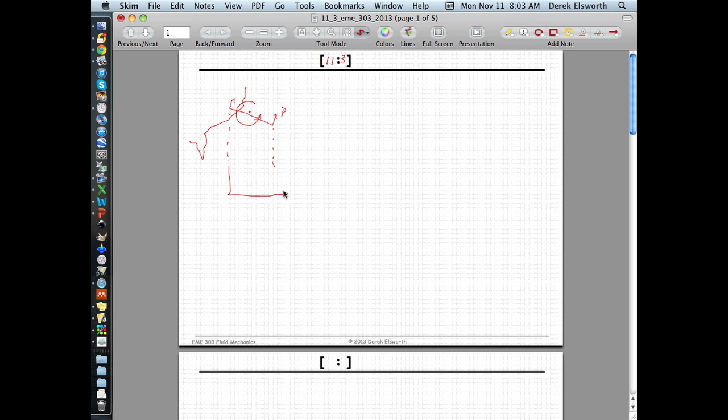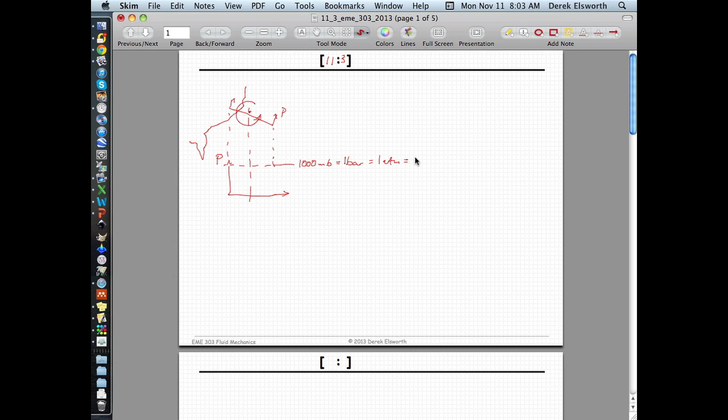If you look at how the pressure changes as you go across the eye, the pressure in the center of the storm is depressed over normal atmospheric, which might be something like 1,000 millibars, which is obviously 1 bar, which is 1 atmosphere. All these synonyms - we know that 1 atmosphere is 100 kPa, so 0.1 MPa.

The depressed pressure in the center of the storm might be something of the order of 900 millibars. So this depressed pressure is lower by 0.1 of a bar, 1/10 of a bar, and that is 0.01 of a megapascal. So 0.1 bar is going to be equal to a hundredth of a megapascal, or roughly 10 kilopascals.

So if you think about the surface of the ocean, what that physically means is that this pressure here is lower than that. If you imagine what the ocean must look like, it bows up to deal with that. What we know from fluid statics is that if you go horizontally in a static fluid - it's not quite static, but it probably is to some reasonable approximation - then the pressure at this point has to equal the pressure at this point.

So if the pressure at this point is equal to 0.1 MPa, and this pressure here at the surface is equal to 0.1 MPa minus a tenth of that, then this height here has to be, to catch up with it, such that the pressure change equals the difference in these. So going up from here, you have to subtract off a pressure to equal this amount here, and this change in pressure has to be 10 kPa.

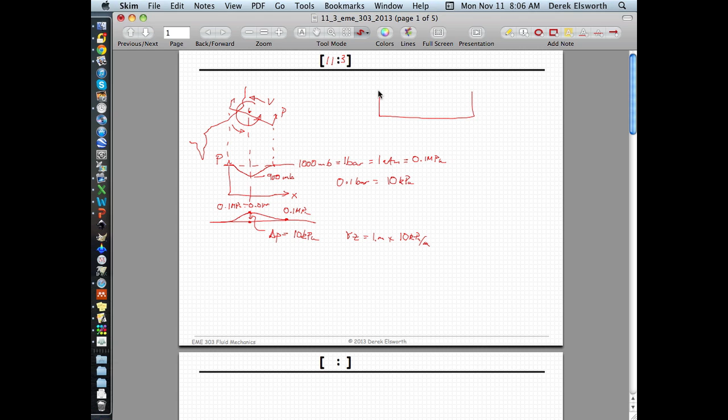So I suppose you could also do the calculation where you look basically at this length of sea that has some velocity pattern above it. This is just out of curiosity more than anything else.

If you look at the wind velocity versus elevation above the sea level, it would look something like this. Close to the sea, it's going at zero because it's attached to the water. Up here, it would be going at the atmospheric velocity, which might be 200 miles an hour, or actually higher—the jet stream moves at something like that. So there's this difference in velocity that occurs here.

We know from Newton's law of viscosity that viscosity times the change in velocity with location—this is velocity in the x direction, but with vertical location—drives a shear stress. So if you think about it, that shear stress is being applied onto the top of the ocean.

This length might be, I don't know, some length here. What you could do is a simple calculation, just a free body diagram. If you looked at the effect of that, you have this tapering wedge. It's kind of pushing the water up with some force, and there has to be a force pushing back on this side. This force would be some unit weight of water multiplied by some height.

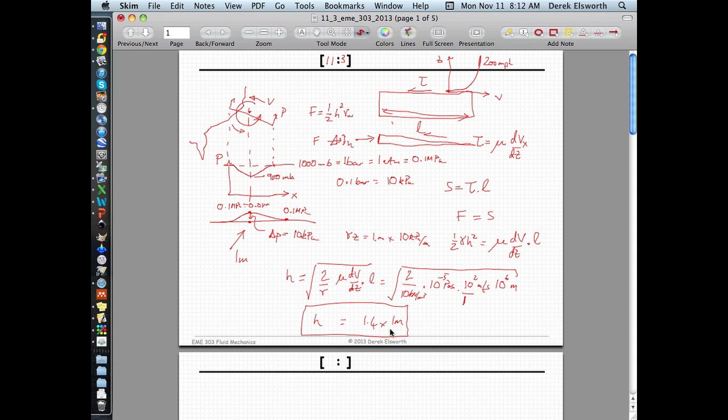So you need to use this is 1,000 kilometers, right? 10 to the 6 meters. And that's of the order of a meter or so as well. So a couple of meters. They're talking about this wall being multiple meters tall.

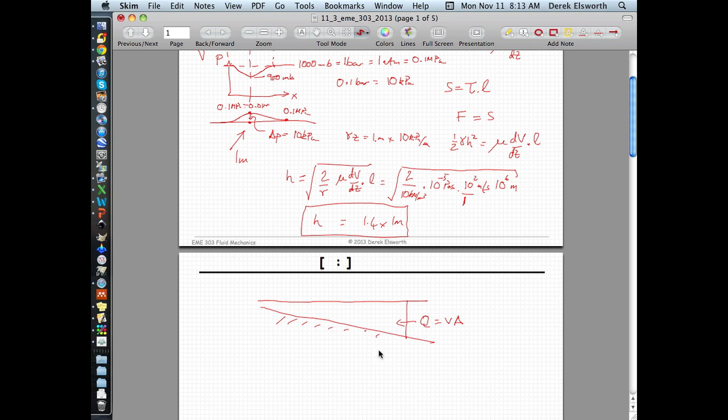I guess the other effect, which you also see with waves breaking on a beach: if you think about the shoreline looking like this, and the actual sea bottom looking like this, you can think of waves as a flow rate equal to velocity times area. If this cross-sectional area reduces as you come onshore, the flow tries to speed up. It can't speed up because it has inertia, and as a result it gains height, just like breaking waves.

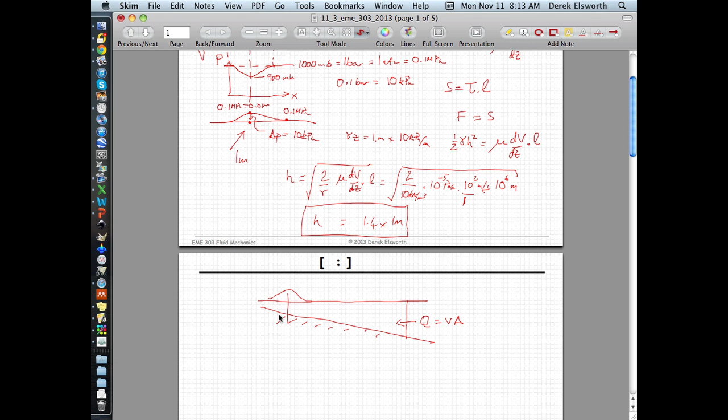We know that tsunamis, which are tidal-ish waves offshore, are really only a few centimeters tall, but when they come onshore, they're influenced by this reduction in depth, and they pile up against the shoreline, moving in like a big plug, slowly raising the ambient level and moving inshore. So you certainly have enough fluid mechanics to look at those things today, but that's not what we're talking about today. That's the reason for the unfortunate circumstance in the Philippines.

What we were going to talk about today is our continuing quest to understand flow in pipes. This builds on what we've talked about so far. Two things we'll cover are pipe networks and how to measure flow rates. We've talked a little about flow rate measurements with Venturi flumes in the absence of viscous effects, which now we're incorporating.

Let's see what we have on here to look at this. Flow in pipes—we didn't really talk about this at the time, but we mentioned it. The Deepwater Horizon problem was actually a failure in the material around it. I guess this is the picture of what is thought to have happened. This is a paper in the Proceedings of the National Academy of Sciences that looked at the behavior offshore.

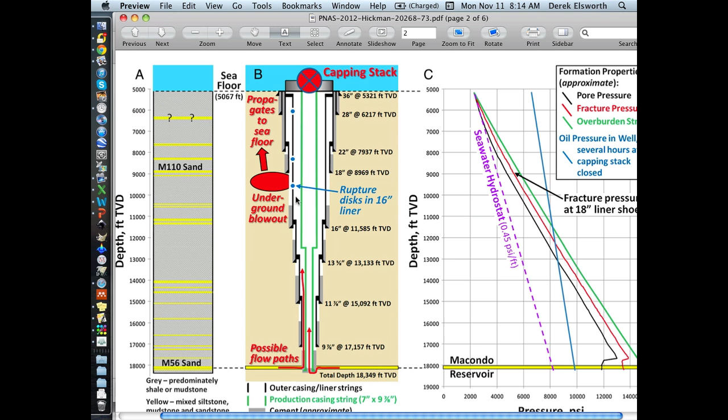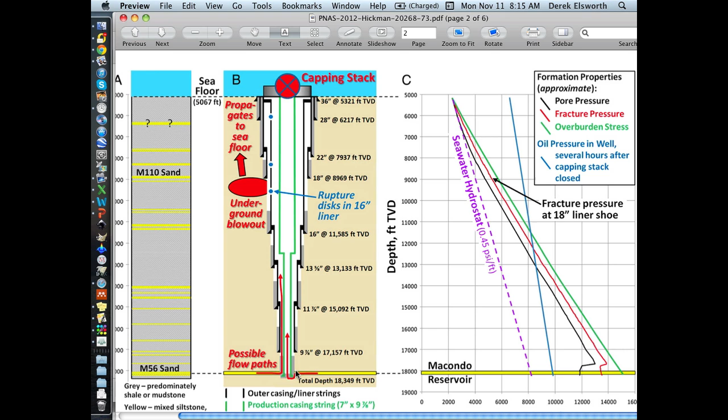The idea is as you go down, you have these multiple nested casings. You start off with a big hole, drill to some depth, then put a smaller hole beyond that, and case progressively narrower and narrower bore until you get to the reservoir. In this case, at 18,000 feet below sea level, which is 3 miles—just amazing. The sea level there is a mile deep at the location in the first place.

What is supposed to have happened is that you have overpressures here from compacting the sands. They really aren't reservoirs as you think of them, but very loose sands. As you put more material on top of them, they take the weight of that material and push that into the fluids column.

The fluids column is the hydrocarbons and waters in there, which is the same idea as if you take a sponge and put it in a Ziploc bag and loaded it—the sponge would take that load because the fluid can't get out. If you take the sponge full of water and just compress it, it'll just compress. But if you stop the fluid from going out of it, it becomes quite rigid and can take a much larger load. Reservoirs are kind of like that—soft reservoirs with very low permeability. The fluid can't escape, so it's like being in a Ziploc bag.

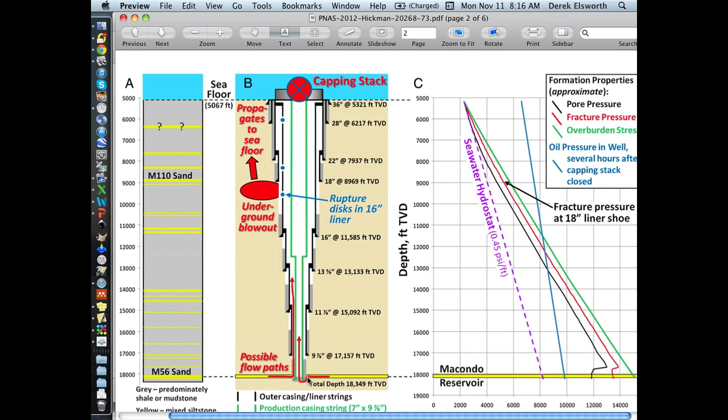So you can get overpressures. If you look at the pressure column as you go down, you can end up with fluid pressures which are actually much bigger than the lithostat, in other words, the weight of rock sitting above you. And when it gets larger than the lithostat, it fractures the rock naturally and tries to get up.

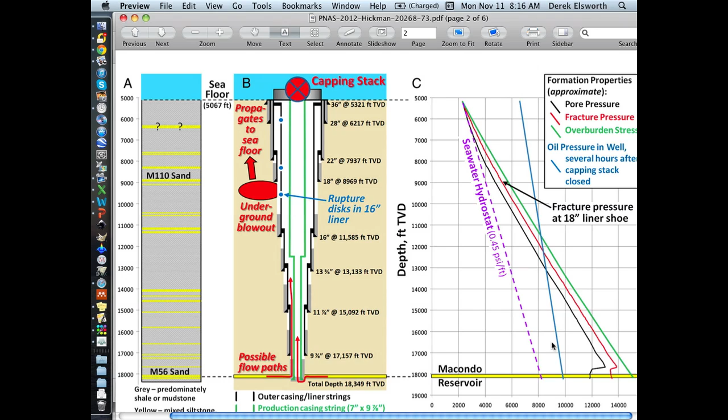So what happens if you have a very large pressure column in your well bore, with these potential fluid pressures underneath the overburden stress, since that's what limits them? They'll fracture the rock to release pressure if it gets too high. But if you have a well bore which suddenly links this large pressure at the bottom with the formation all the way up, you end up with a very large pressure potentially able to break out of the casing.

I think that's exactly what happened: you had a large overpressure in the hole, some feature in the casing wasn't quite right, it ruptured the casing, and it came out on the outside, with tragic circumstances that unfolded after that.

So that's certainly piping in some respect. We're talking about pipe networks today, and pipe networks are used to transport all kinds of things around the country, gas being perhaps the most notable. We'll look at very simple networks, nothing like the complex networks that take fluids from the Gulf, and now Pennsylvania as well, into the population centers of the Northeast and the Ohio Valley.

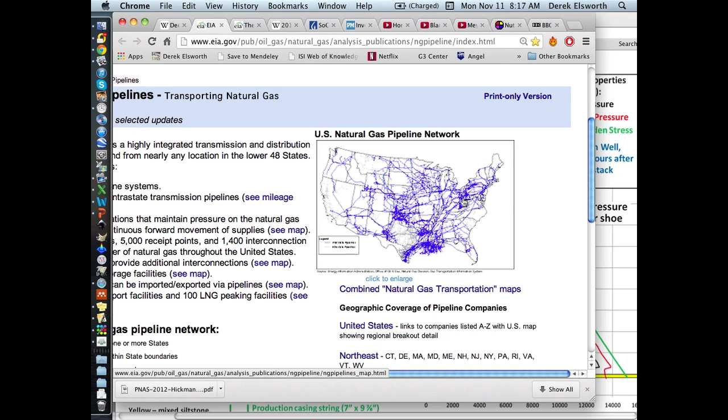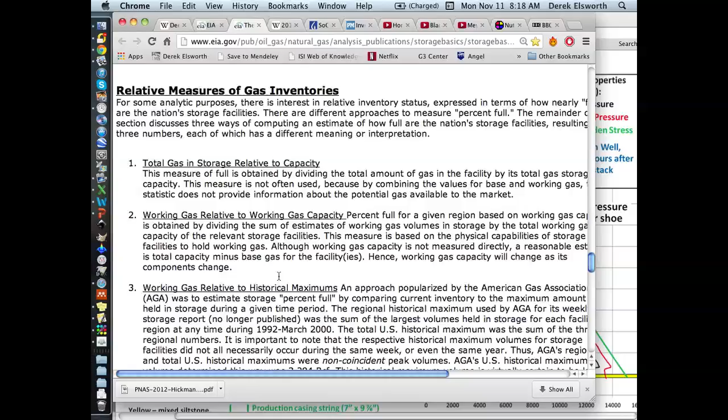So you probably know, or perhaps you don't, I think we alluded to it in this class. Well, no pictures in here? I thought it was in here. Gas storage, I guess I thought there were pictures. No pictures? Oh yeah, okay.

If you go up to northern Pennsylvania, there are salt deposits, and in those salt deposits there are caverns. Caverns are basically just long drill holes. You pump water into it to dissolve the salt, and as you dissolve it you get a long cigar-shaped cavity that you fill with water when you don't need it. When you want to store gas, you just put gas in it. The salt is very low permeability, so it's well sealed. You displace the water up to the surface while you have gas in it, and when you want to recover the gas, you pump the water back in and the gas comes out, then you ship the gas elsewhere.

I didn't realize this until a meeting in China a couple years ago, that in Belgium they actually use abandoned coal mines to store natural gas, which seems interesting because they're not particularly well sealed, but apparently they do that. And of course the Strategic Petroleum Reserve in Louisiana and Texas holds crude oil kept in salt caverns as well, for times to ameliorate shortages which may be promulgated on a political basis or for any other reason.

A couple of years ago, I guess 3 years ago, San Bruno, right next to San Francisco Airport, where we saw the car being blown off by the jet engine—there was a gas pipeline that happened to go through a neighborhood, like they're talking about in State College, which exploded and killed, I guess, 8 people, and lit up the sky and devastated the place. So there are some inherent risks with the fracturing of these pipelines.

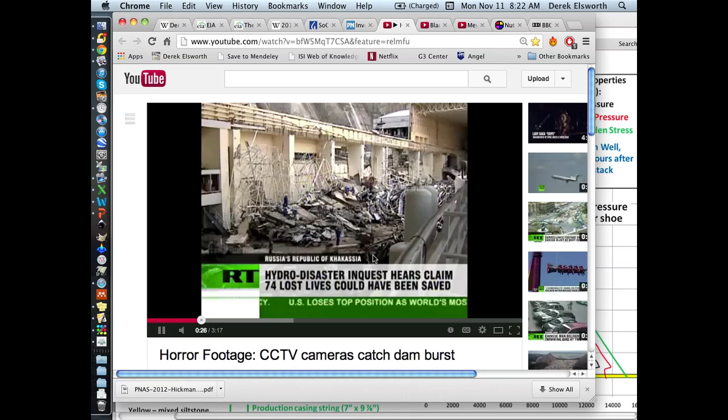You see these unfortunate people happily doing whatever they're doing, and all of a sudden, the water supply into one of these turbines caused the turbine to go off kilter and break apart. The water rushing through that turbine became uncapped and unleashed into the whole turbine hole, which is present in the rock at the base of the dam. As a result, a large number of people unfortunately lost their lives.

But again, that's fluid flow in pipes and the vagaries of having something go wrong in that particular case.

That's a backup for septic systems. Don't really want to get into that, kind of unsavory this time in the morning - unsavory any time, perhaps, but especially this time in the morning. I can't remember... oh, it's okay, we'll deal with that later.

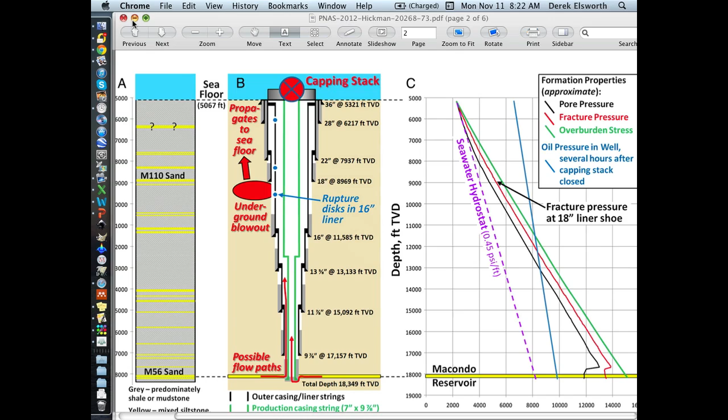So, nutating disk meter - we'll talk about that if we get to talking about flow rate measurements, all right?

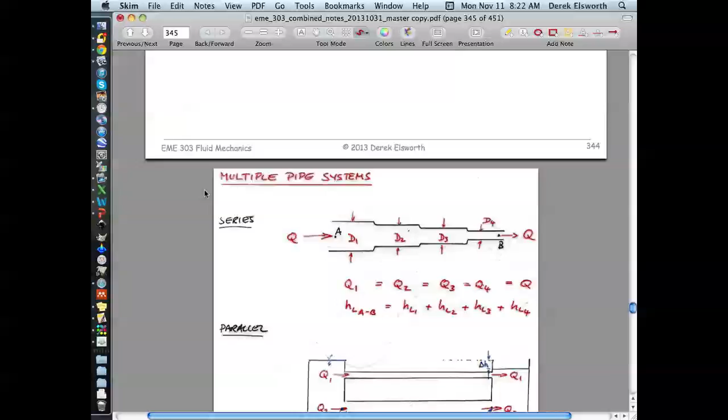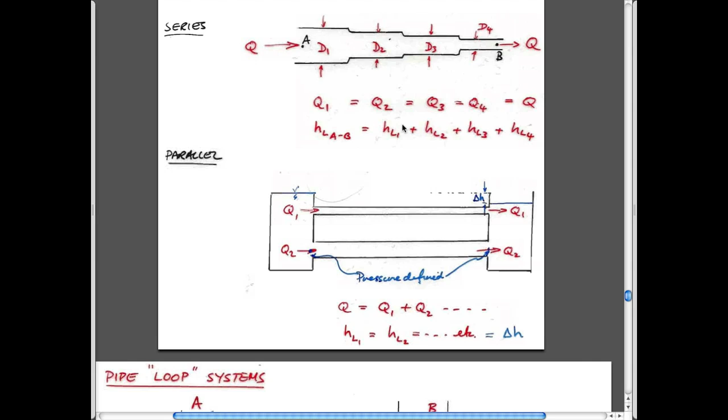So anyway, that brings us back to talking about pipe networks. Pipe networks are relatively straightforward, as you can imagine. The idea is that instead of having a single pipe, you have multiple pipes in some kind of arrangement. You could imagine the different arrangements you would have, and they fall into two main categories: either in series or in parallel.

If they're in series, the requirement is that the amount of fluid flowing across this surface has to be the same amount flowing across this surface, and this surface, and this surface - these arbitrary surfaces that we cut. So we know the volumetric flow rates have to be the same.

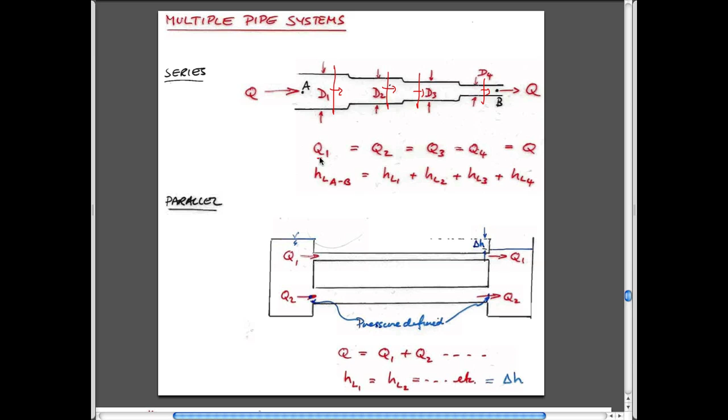What that physically means is that the head loss we have - we know what the flow rates are. We could write these flow rates also as velocity 1 times A1, and also as velocity 2 times A2.

We know that the head loss over these sections is a function of the velocities and the lengths and diameters of the pipes. So what we'd assume is that the head loss as we go from this upstream location at point A to this downstream location at point B would just be the sum of the individual head losses that occur on each of these pipes.

Makes sense, right? If we know the volume flow rate, and therefore the actual velocity in each of these pipes, we can calculate the head loss as equal to the friction factor, length over diameter, and the velocity head term, where this velocity head is the velocity in the pipe, in the actual fitting.

So we'd have a loss in this pipe, a loss in this pipe, a loss in this pipe, and in the fourth one. If you add those components together, it would give you the total loss over the whole transit through that pipe. So that's series pipes.

It's analogous actually to series flow in resistors as well - you could think of that, but we're not talking about that here.

So for parallel pipes, the behavior is such that the flow rates now are independent. You could have one flow rate occurring in this pipe and a different flow rate occurring in the second pipe.

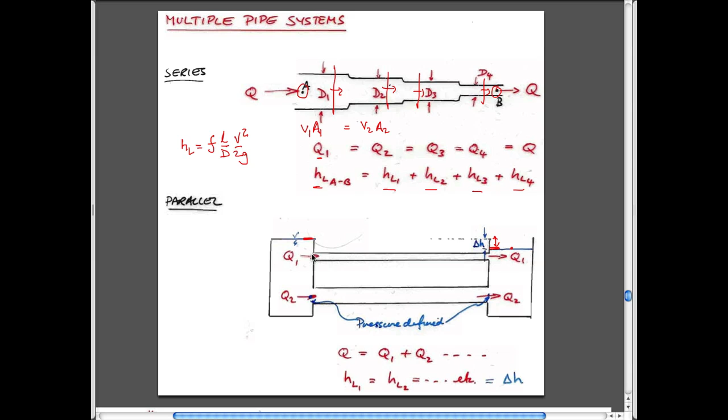Because the head drop between the upstream location for pipe 1 is the same as the head drop as it goes through pipe 2, we know that instead of the flow rates being the same, what's the same in these cases is that the head losses in each of the individual pipes has to be the same. So for series pipes, the flow rate has to be the same in every single pipe. In parallel, the head loss has to be the same in every single pipe.

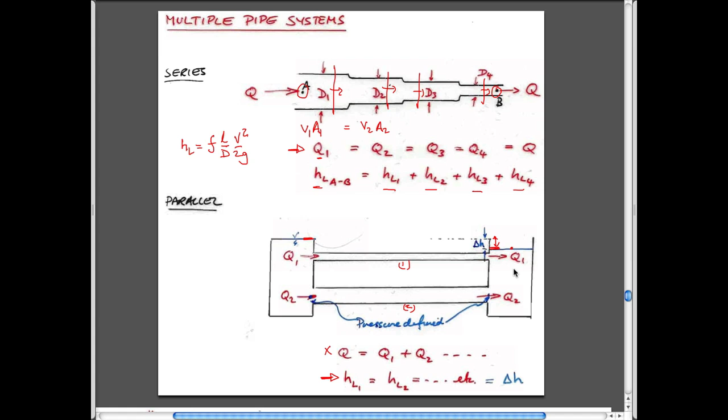And the corresponding magnitude is just the sum of the flow rates. The flow rate in here plus the flow rate in here plus the flow rate in any other pipe you have would be the cumulative exchange of fluid between the upstream reservoir and the downstream reservoir. So that's the rule we have to remember for simple multiple pipe systems.

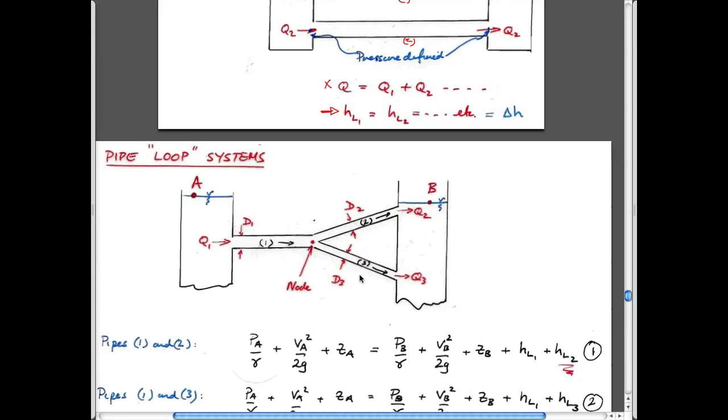We'll do a couple of examples that illustrate this. What happens if we have pipe loop systems that are defined in some way? In this case, we have a bifurcating pipe that's supplying fluid at some higher elevation here to some lower elevation here, and there's a change in head as we go from one to the other.

What we could do is write Bernoulli between these 2 points and take it on 2 different routes - the low road and the high road, as you might say. We go through pipe 1 in both cases, but in one case we'll branch off to the top side and end up in this tank via this top pipe. In the other case we'll do the opposite and go down through the bottom pipe.

So the first route is between pipes 1 and 2. If we write Bernoulli between each of these cases, we have the conditions at this point here and at this point here, which are these 2 values. In addition, we have the head losses that occur in this pipe and this pipe. So that's what we've been used to writing Bernoulli as before.

If we take the alternate route from A to B, which goes through this bottom pipe, comes through here and goes along here and down through here and up to here - just a different route. Again, we have the Bernoulli expressions at A and B, which are identical between these 2 cases. And we have the head losses that occur due to flow in this pipe, which is the same as this one, because they're both occurring in the same pipe.

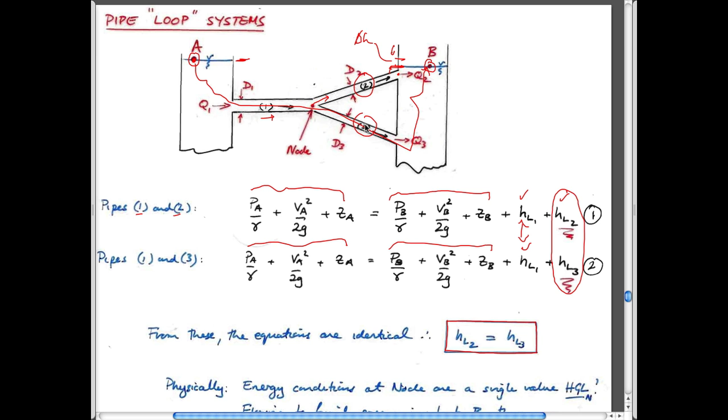So we could assume that for these bifurcated systems, the head loss has to be the same in both of these final pipes - pipes 2 and pipes 3, not pipe 1. So that's the third rule for when we have somewhat more complex systems.

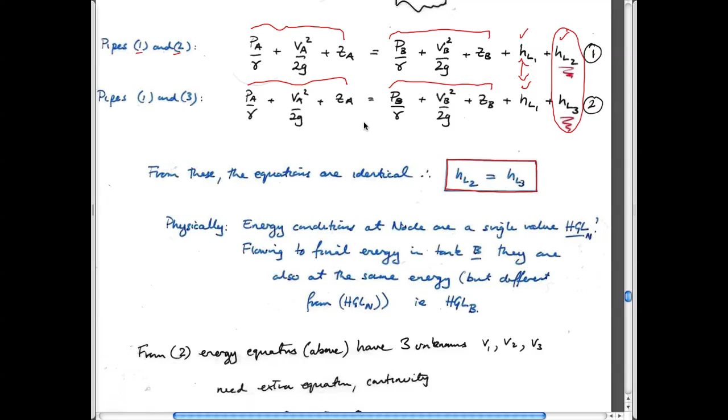Again, we have the requirement that continuity would say that if you write continuity, you could surmise that the flow rate in the first pipe has to be distributed in both of these pipes, so this has to be the case as well. So that's the other condition.

So as in the case for series flow and parallel flow, we had a condition on continuity and on head loss. Likewise here we also have conditions on continuity and head loss. You just have to think about these in terms of what the logical behaviors are. This comes out because each of these components on this side have to be the same. The head loss in this pipe has to be a single number, so the only other variable which has to match up has to be that as well.

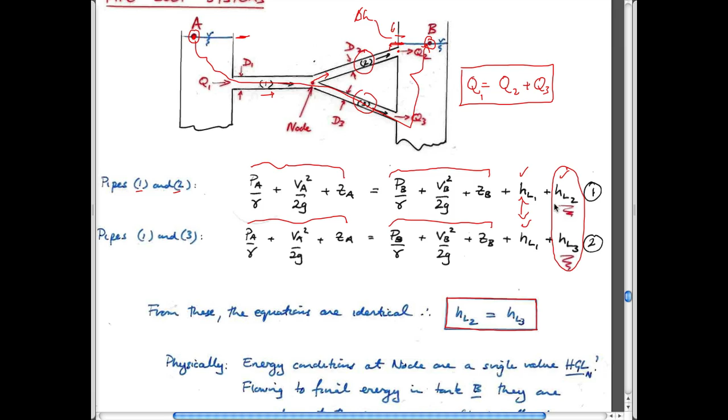Okay, so let's do a couple of examples. One of which is a doable example, one of which is something that would never occur on a test. I think this one might have actually occurred on a test once, but this is the more simple of the ones that we'll deal with.

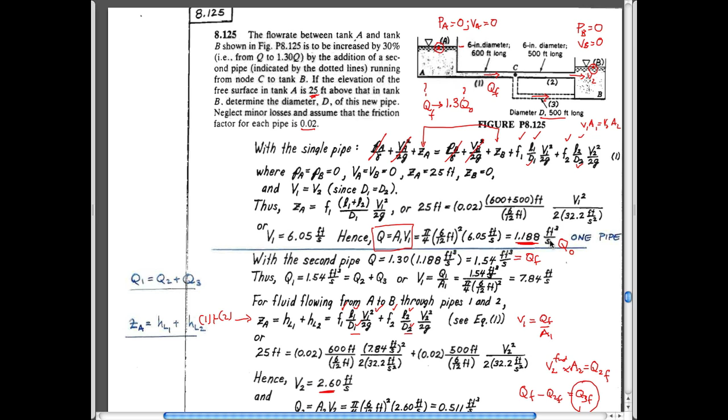In other words, big picture: we know the flow rate out of here, we know the total flow rate of the two of them, so the flow rate out of the bottom one is just the difference between those flow rates. If we know the total flow rate and the flow rate out of the top pipe, the flow rate out of the bottom pipe we know.

If we know this bottom flow rate, then we can define this as a velocity, and we can write Bernoulli between this point A and B, but going along this circuit, and we can solve for the diameter of this pipe that allows us to get that flow rate. That's what we're trying to do.

So finally, we write Bernoulli between points A and B on the bottom circuit, between pipes 1 and 3. Before we did it on the top circuit, so this was this calculation with this not in place, and now this is this calculation with this in place. So we know the velocity here, we know the velocity here, and if we write Bernoulli, we can solve for the thing that we don't know, which will be this.

We know what this velocity will be as a function of the diameter of the pipe. We know what the length of the pipe is, we know what the friction factor is. We certainly know what the velocity coming into this is, and also the dimensions of the pipe. And we also know the magnitudes of these head losses, since these head losses are these magnitudes.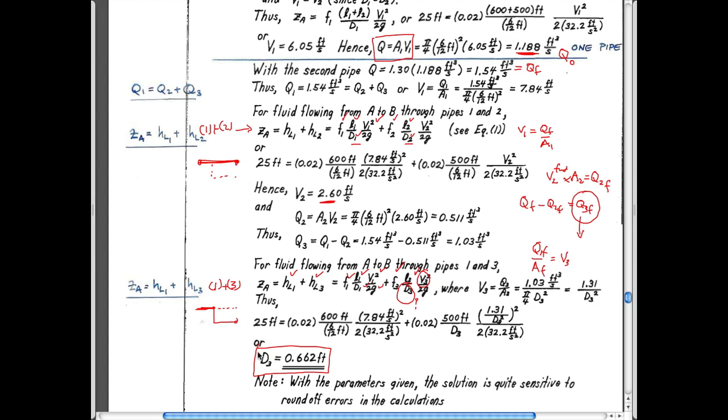So to recap, we have a flow rate. When this is closed off, we can calculate the flow rate through here, and we know what that is. We multiply it by 30%.

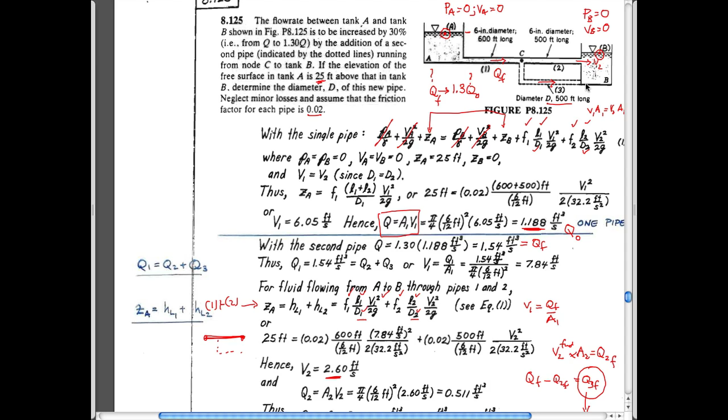So now we know that the 30% flow rate has to come through here, and to get the head loss along here, we can calculate the appropriate flow rate in this pipe. Once we know the flow rate in this pipe, and that the total flow rate has to be 1.3 times the original, we can calculate the flow rate in the bottom pipe. If we know the flow rate in the bottom pipe, we can write Bernoulli for this circuit and solve for the diameter.

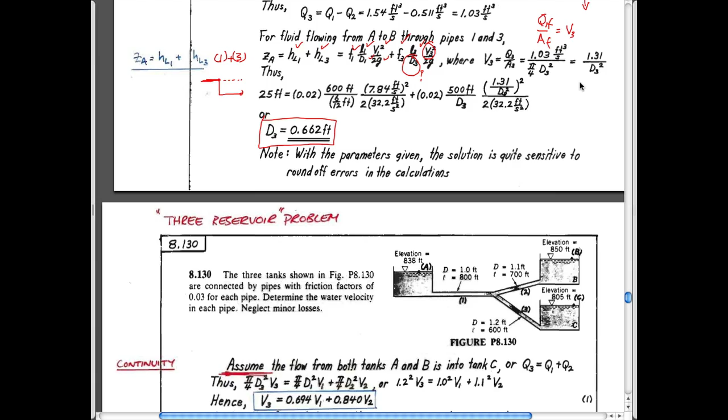So it gets a little more complicated, and you have to be a bit more creative, but that's basically the way of doing it. This, you'll be happy to know, is a question you will never see on a test, but don't switch off. It starts getting more complicated, and perhaps we'll only do this in overview.

The idea is you have 3 tanks. So you can imagine if my hands are each a tank and my foot, which some of you can't see, is the other tank, then if they're connected through the trunk of my body with these as open reservoirs at the top, it will all flow out through my bottom foot at that reservoir.

So if you take one of these tanks and change the elevation, you could also imagine it will flow from this tank and this tank into my foot. But at some stage, depending on the piping system, if the connection between my arm and this arm had really low friction factor pipes, then the water that comes out of here would actually squirt out of this reservoir because it's a good connection.

So you're never quite sure whether it's going from these 2 upper reservoirs to the lower reservoir in my foot, or if you change the elevation of this one, whether it starts flowing from the highest reservoir out of the intermediate reservoir. It depends on the connections of the pipe. If this is a really narrow capillary pipe, both would probably drain into my foot, but if it was really open, it would just overspill if this one was lower.

In this particular case, you have an elevation of the surface at 850 feet, 838, and 805 - highest, intermediate, and lowest. So one reasonable thing to expect would be that it could flow from these into this lower one. But if this was a really great connection here, this would flow out of here and just flow over here. So there are subtle controls on the piping - if this was a big pipe that saw the pressure at this point, it would just flow over.

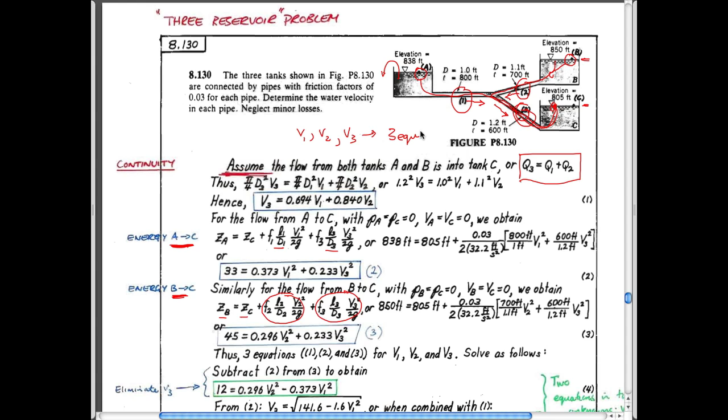So you basically have 3 expressions, so you have 3 equations, and 3 unknowns that you don't know. You don't know the velocity in this pipe, velocity 1, you don't know the velocity in this pipe, and you don't know the velocity in this pipe. So your unknowns are V1, V2, and V3. You have 3 equations, and you have to try to solve them. It's a little bit involved because these 3 unknowns are actually squares of unknowns.

So it gets kind of messy, and if you want to, you can go through this. But I will pledge to you that you'll never see that on an exam, that's basically the idea.

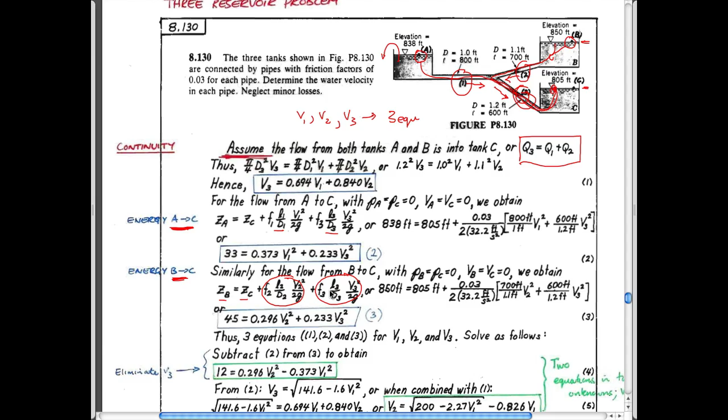I think the interesting thing is that you have to make some decision as to what is flowing where. It's clear if these 2 upper reservoirs are at the same elevation, that it has to go from the upper ones to the lower one. If one is at a lower elevation, it's not clear whether that is the case or whether it would overflow the intermediate one. Certainly it can't flow up from the lowest one into the intermediate one, but that's the other option. Okay, so that's kind of a quick view of pipe flows.

So series and parallel: in series, the flow rates have to be the same, and the head drops have to be cumulative. In parallel, the head drops have to be the same, and the flow rates have to be additive, so you sum them up.

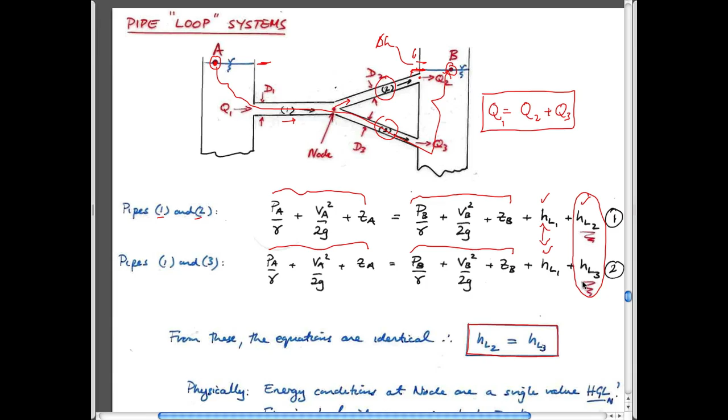And in the bifurcating pipe, it's slightly different in that you have this requirement where you have to sum the flow rates. This one has to equal the sum of these two, and the head drops in the second arrangement have to be equivalent to each other. So anyway, that's kind of closure on our pipe networks.

We talked about measuring flows before. What is different now is that we used Bernoulli's expression to be able to investigate some of these. There are three principal methods of measuring flows.

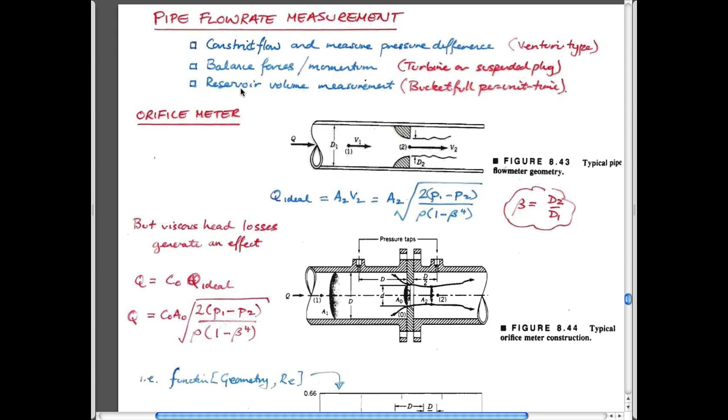One is the Venturi idea of constricting flow and measuring the pressure difference, a bit like the pitot tube as well. One is to use force balance or momentum to measure them. And the other one is to have a given volume and fill it - fill a bucket of water over 10 minutes, you know the volume of water, you know how long it took to fill it, so you know what the flow rate is. Those are the three general methods.

So let's look very quickly at them. The first one is to constrict flow. We've talked about it - the idea is you have flow in a pipe, you put some kind of constriction in there, and you come up with a flow for the ideal behavior, which is a function of the upstream and downstream pressures, the density of the fluid, because you're killing the velocity of flow, and it's this inertial term that gives you the pressure rise that results from that, and as a function of the geometry of the orifice. So as you make this orifice smaller compared to the pipe, you have a bigger pressure change because you're disturbing the flow more - you're stagnating more flow, if you like.

So we showed an equation for that. The equation is just obtained by writing Bernoulli between these 2 points and solving, using continuity. But what it doesn't include, of course, because Bernoulli doesn't include viscous forces, is the effects of viscosity on that behavior. And that can be important.

So if you want to include the effects of viscosity, what you do is take this ideal volumetric flow rate related to pressures, which ignores the effects of viscosity, and multiply it by some number that's calibrated for the influence of viscosity. And to do that, what do you do? Well, you just run fluids with different viscosities through it, or run fluids at different Reynolds numbers, and see how far it differs from the ideal case, and you've calibrated your system.

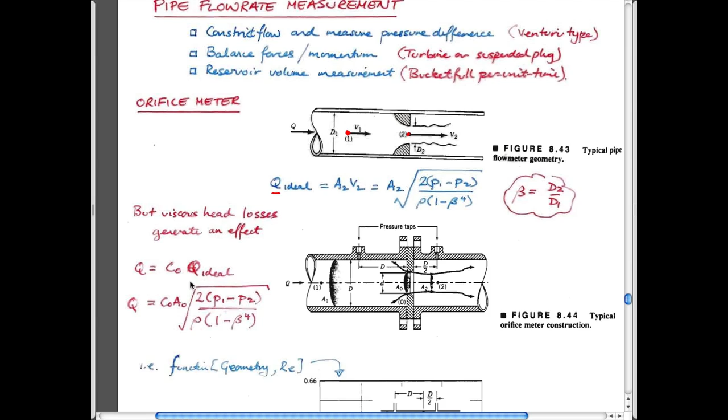And so these are just some examples of exactly that - this correction factor that you add, as a function, not surprisingly, of Reynolds number. It changes as a function of Reynolds number, and of course this is an indication of viscosity, because Reynolds number, you will remember, is the ratio of inertial forces over viscous forces.

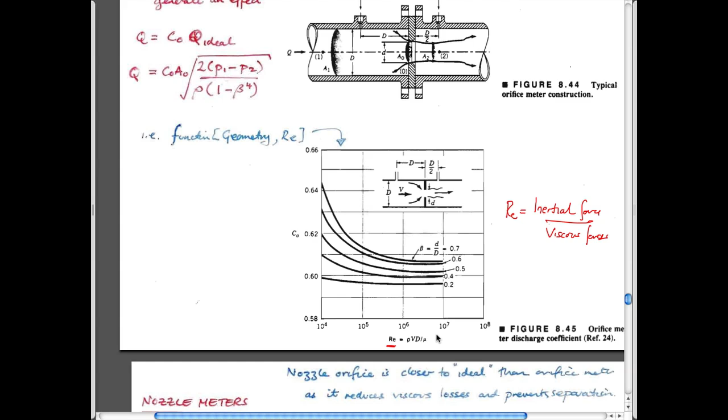So this coefficient depends on density, velocity, diameter, some limiting dimension, and viscosity. As you change the Reynolds number, the magnitude of this coefficient changes. At very large Reynolds numbers, this correction coefficient shimmies down to the same value, because viscous effects are no longer important - it's mainly the inertial effects of large velocities that take over.

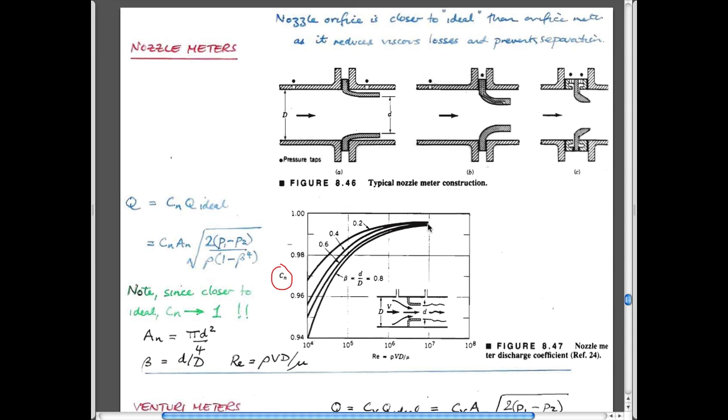We also talked about the fact that if you want a good reading of the pressure or velocity, you're better off with a Venturi meter or a very gradual nozzle. If you look at the correction factors, when you make the change in velocity very gradual and not very big, this correction factor becomes inconsequential - it's about 4 to 6%. At very large Reynolds numbers where viscous effects aren't important, there's almost no correction whatsoever - maybe off by 2%, 1%, 0.5%, or 0.25%.

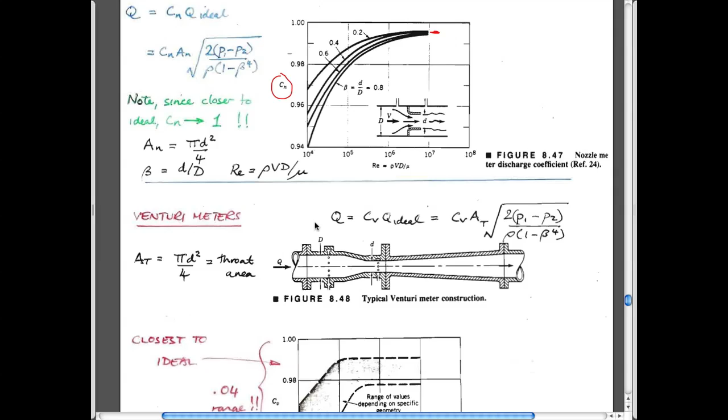So it matters what the magnitude of the viscosity is. Venturi meters are even more gradual ways of changing velocity as you go downstream. So that's the first way of being able to measure flow rates.

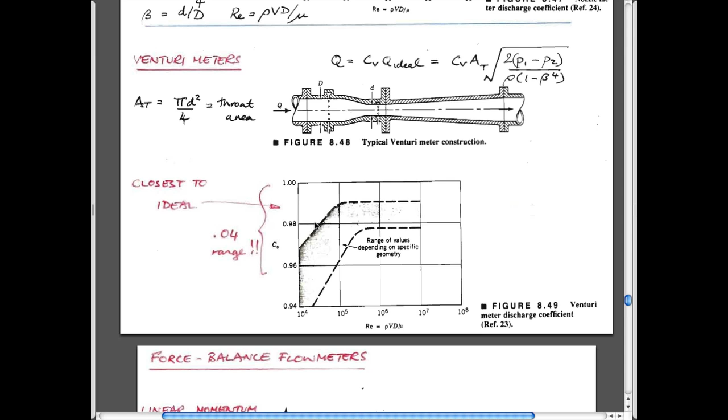Force balance flow meters - I think it's the same way your tire pressure gauge works, as long as it's not an electronic one. You have fluid coming along a pipe, and the pipe widens. If the pipe is relatively narrow here, the velocity of flow is much larger, and if you stagnate that against a static plug, the fluid pressure will be larger than where the flow velocity is less, higher up.

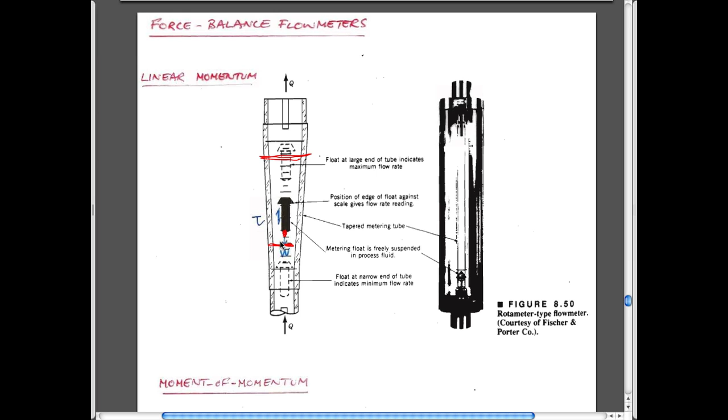If the flow velocity is too high, it'll exert a force on this little bead and move it up, to a point where the pressure on the bead directly balances the weight of the bead. Where the velocity is slower, the pressure will be slower, and so by looking at where this little bead comes to rest within this tapered tube, you get some indication of the pressure or velocity coming out - you can use Bernoulli and stagnation to represent that. A very simple way of doing it.

You could use an impeller - again this is momentum. Fluid going against an impeller - the fluid's moving, the impeller is free to move, and it rotates in this closed pipe. If you count the number of rotations it does by having some armature outside, you can measure the flow rate just by counting the rotations as fluid goes past it.

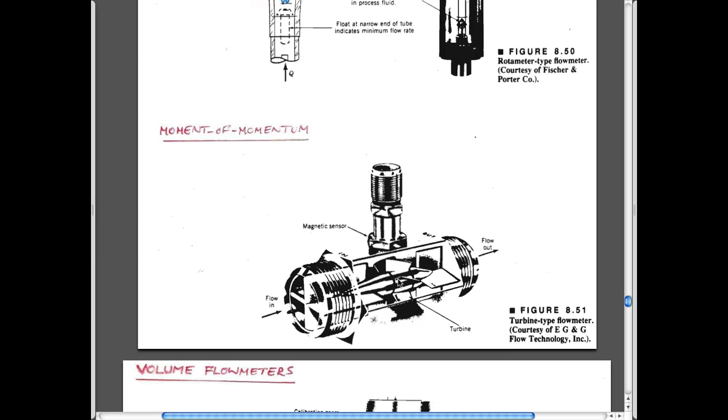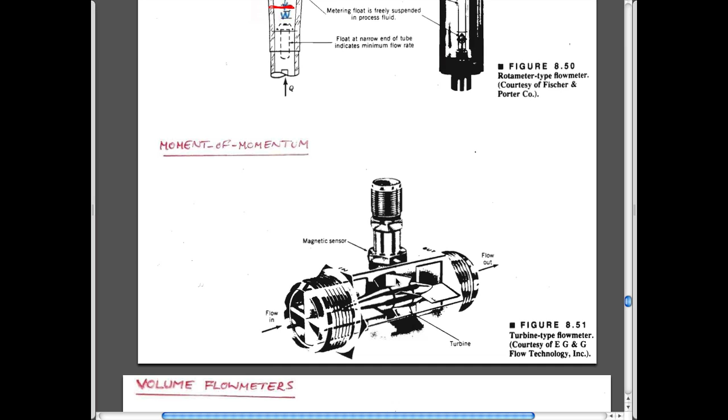So in both cases you're destroying linear momentum - here by physically pushing this up until the force acting down by gravity equals the pressure force applied to it, and this is basically the force acting on a turbine that acts against it. So you change the flow velocity and change pressure - that's one method - and you destroy linear momentum - that's the second.

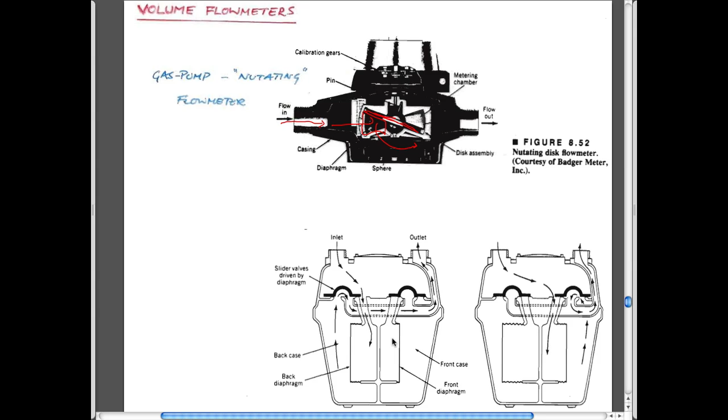So if you have very precious fluids, such as gasoline dispensing at the pump, or natural gas being dispensed in these big tanks you see outside people's houses - I don't quite know exactly how it works, but you fill a volume, it trips this over and moves around, so you basically fill a volume and then discharge it. You get relatively accurate measurements of filling a bucket with water over a given time and then emptying it, and you can use that to very accurately figure out how much natural gas someone's sending you.

So we've gone over a bit, but that's where we are.